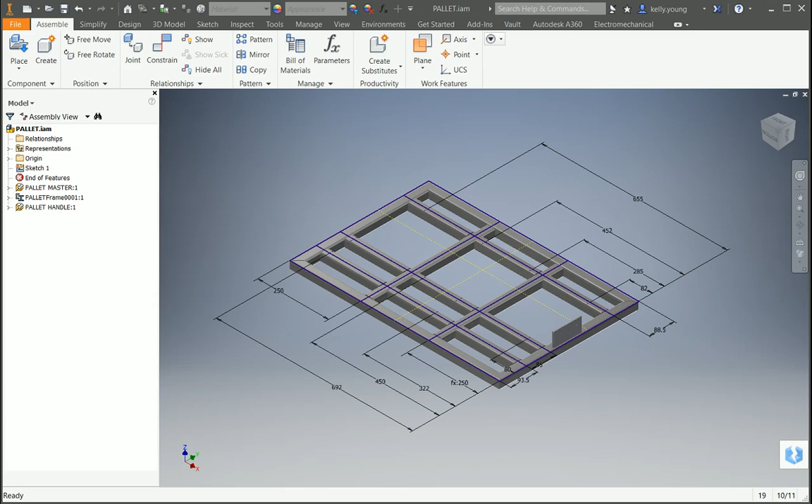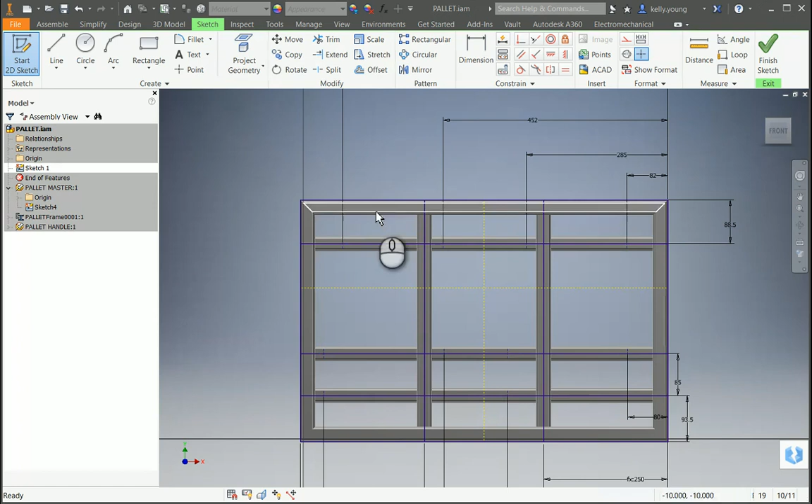So pretty much what you're trying to do is link from Sketch 4 in the master here to Sketch 1 with the points, and then extrude them with a hole, which you can do, but on the actual Sketch 1 it does not, it gives you a fixed point here. So there's a couple things we can do or try to do, and hopefully this will work.

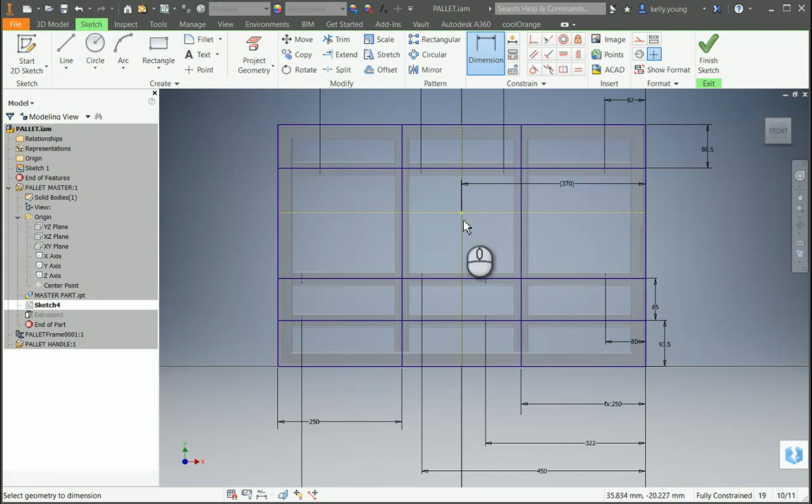So if we come to Sketch 4, first let's make a dimension from this point to the origin. Let's take the center point and project the geometry. So origin here to the line is going to be 370, and from there to this line is going to be that. So if we come into our parameters and rename this one, let's call it origin X and origin Y.

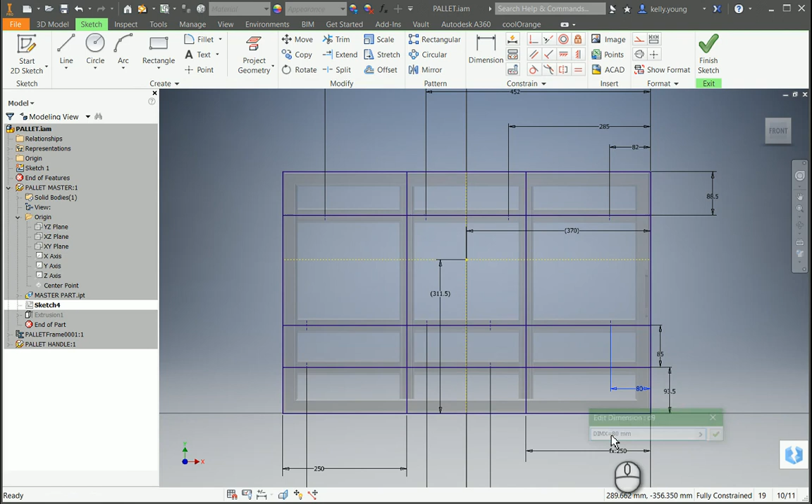There might be a fancier way to do this or pull these, but I'm just going to show you like this. So here we have our points. So now you know that this point wants to be 80. So we're going to call this one dim x equals 80. And, well, let's just call it from this line here, 178.5. And dim y, so that'll be just for this point. So we have our x and our y from this set to the origin by these references.

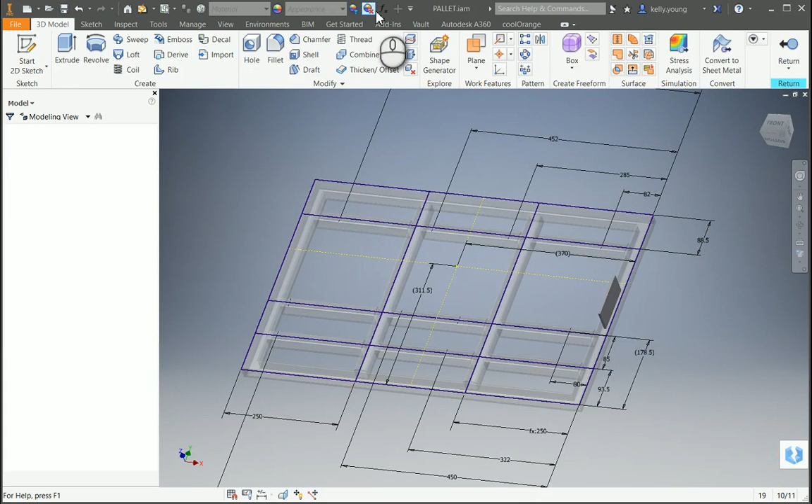So let's go into our parameters and make sure that we export all of these that we just set. Hit done, return. So now we're at the top level.

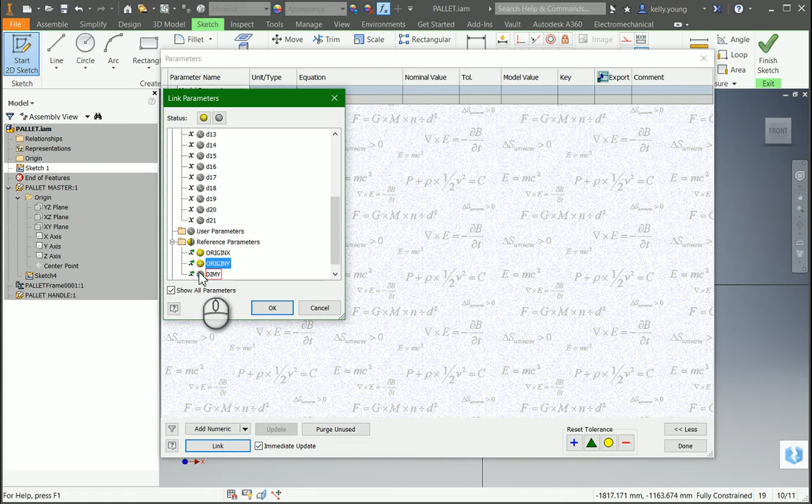Come back into our Sketch 1, and we're going to select all these and delete those out. And then we're going to go into our parameters, and we're going to link these parameters back into the master. And then you'll see that these ones are already checked for export. So then it brings them in as dimensions.

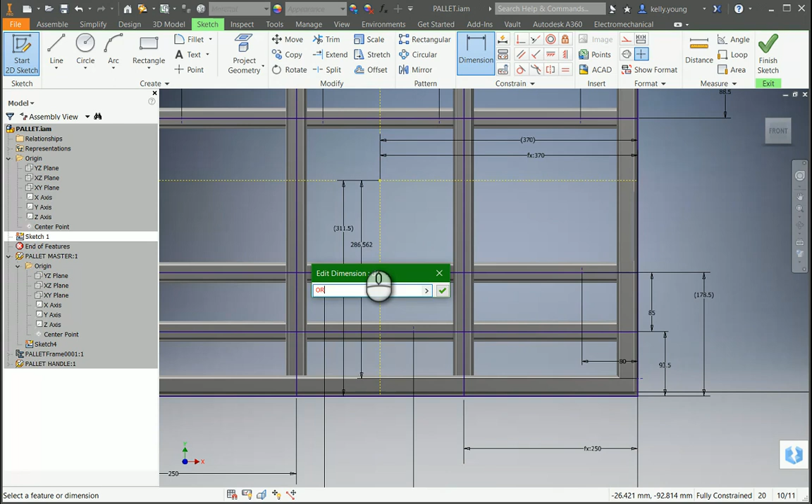So now we can create a point here and call this - go to our center point, project that, draw a dimension from there to here, from here to there, and call this one origin X, and from the origin to here, call that one origin Y. So now we have our origin point.

So let's make another point here. Call this one dim Y and dim X. So now if we finish our sketch and we create our hole, it'll find this point. I'm going to unselect that one. So now we have our hole.

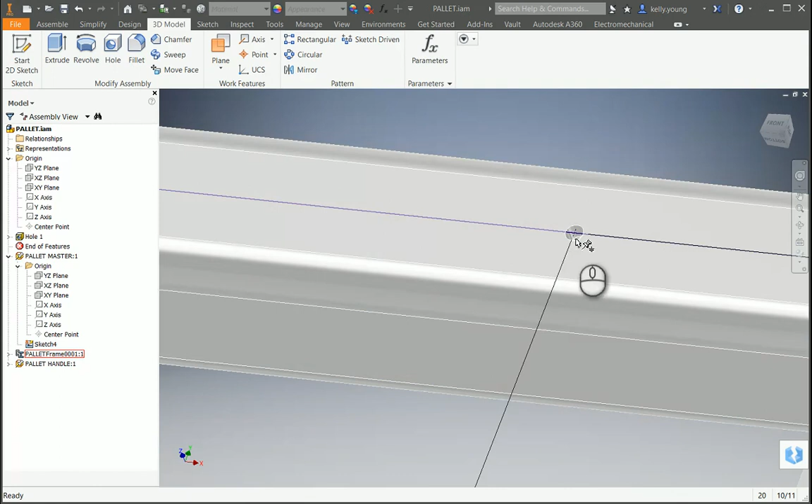So to test this, if we come back into our master sketch and go to Sketch 4, and we change this 80 to 100, and return, and update, it'll stick.

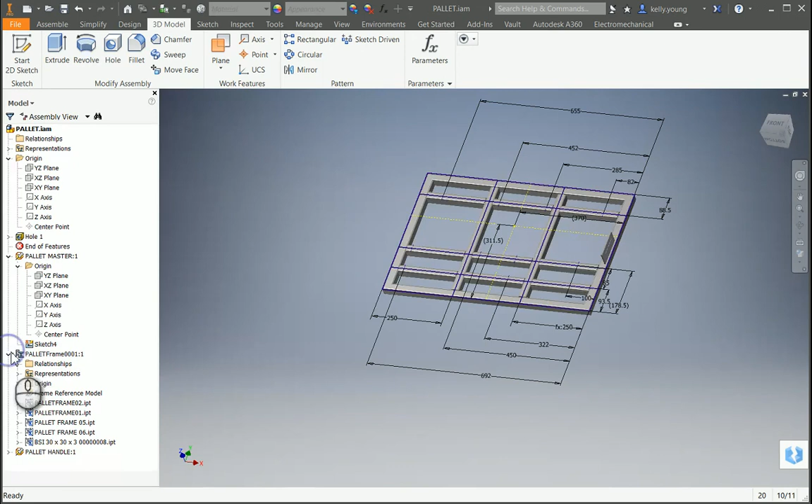So now, let's see if I can figure out how to change your file here, because it's kind of dug deep down. It's probably in the master sketch here. Yeah, master part, open base component. All right, so Sketch 1, I think, is where everything's controlled.

So if we change - let's see, that one here, that one 20, 100, 530, change that to 450, and this one to 600. Just trying to make this thing shorter and squattier.

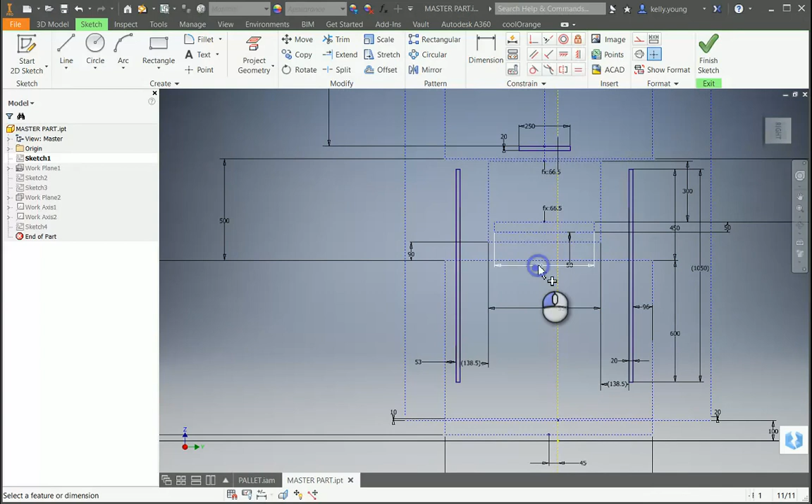No, where's this one? Where is this thing controlled? There, 530, 90. Function there, 1200. Does that shrink it? Sure, we changed a bunch of numbers. Let's see what happens.

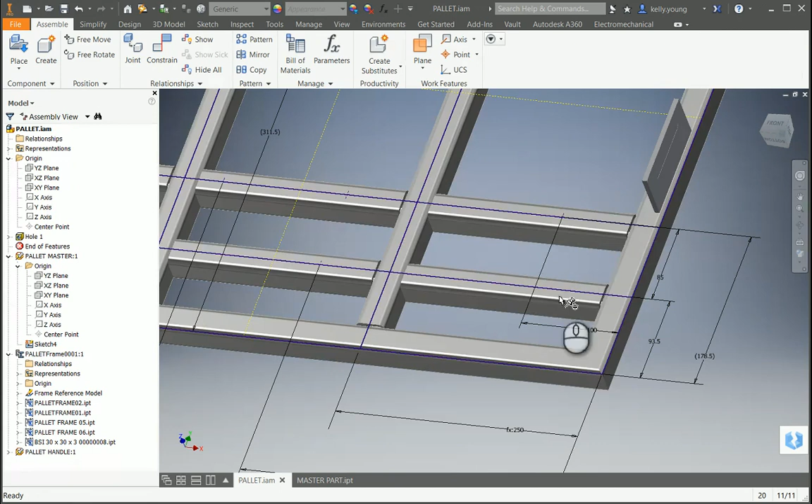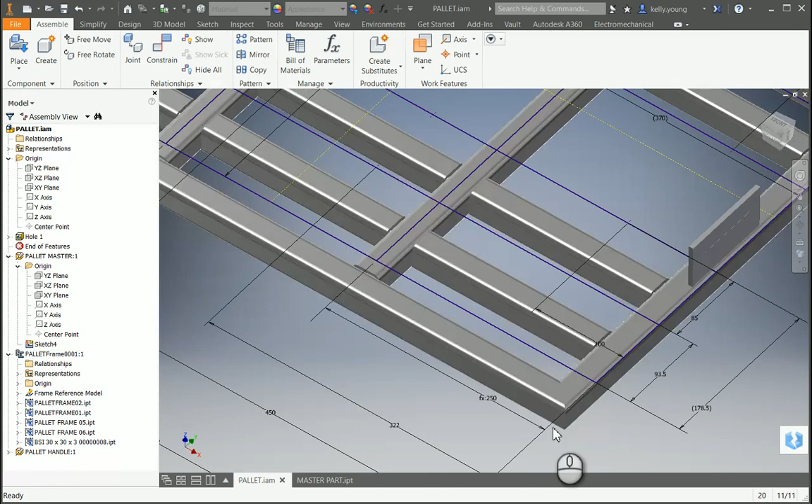And did that stick? Where's our hole? It's up there. So anywho, I don't know if that works or not, based off of your sketch, because then this thing's all jacked up.

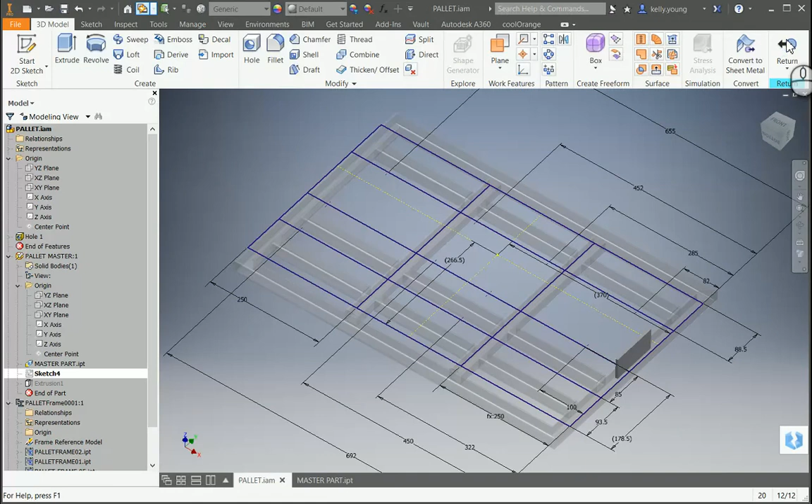So it did work. So that's how you do it. Hopefully that made a little bit of sense and didn't get you too crazy. But it should stick as long as you link the parts to the base part and use a dimension reference.